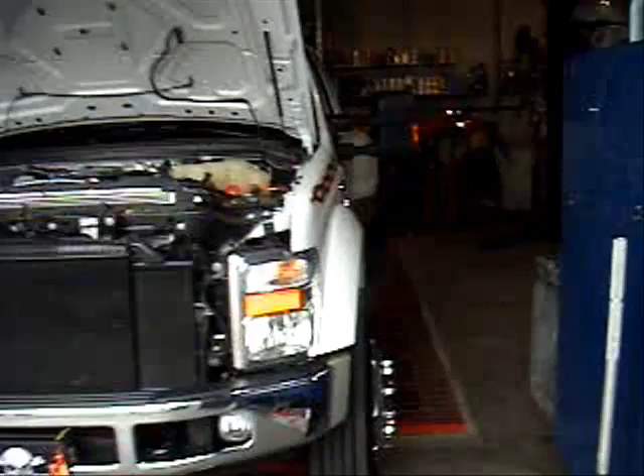What we're going to do here is dyno the truck first to see what kind of horsepower numbers we make, so we can check the differences before and after with the exhaust, the intake, and the programmer.

Here we are on the dyno, about to dyno this Ford F-450 in stock form. It's a little tough dynoing these trucks because they don't really get the load they would on the street. So all we're using this for is a database, so we can see what type of power gains we made. Ultimately we won't see the full potential because the loads will be different, but we're going to give it a shot. We'll put it in third gear and do a pass right now. Very fast pass, as it only revs to 3,700.

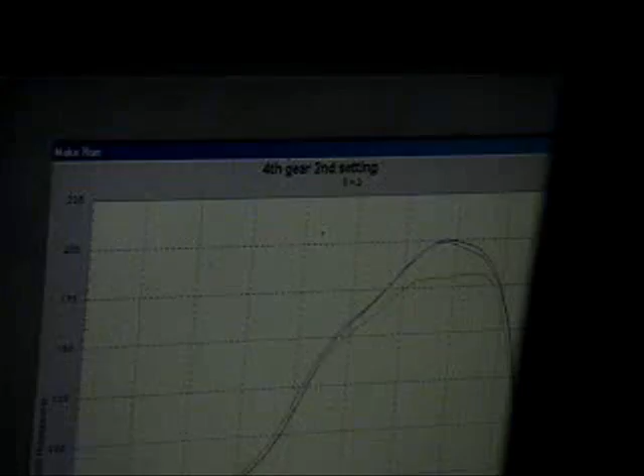That was it. Now there's the dyno pull. What did we get? A little over 200.

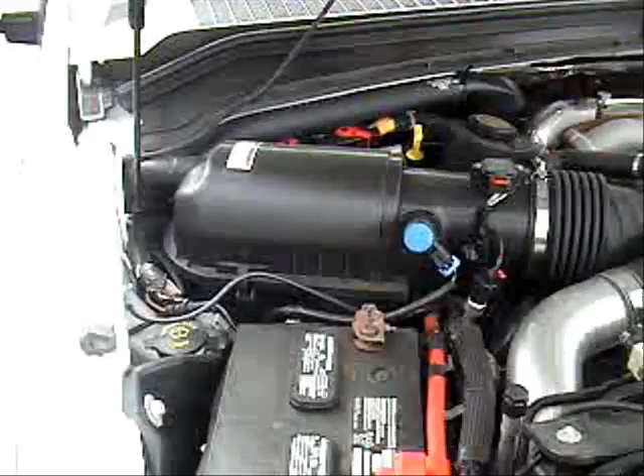Now it's time for the modifications. There's a stock intake box, so we're going to remove that and replace it with an aftermarket unit. We're going to be removing the stock exhaust down there, and putting stacks in the bed of the truck with a nice diamond plate cover. Then we're going to program it and see what kind of gains we can make. Really nice truck, by the way.

We're just putting the finishing touches on the air intake box, and next we'll be working on the exhaust.

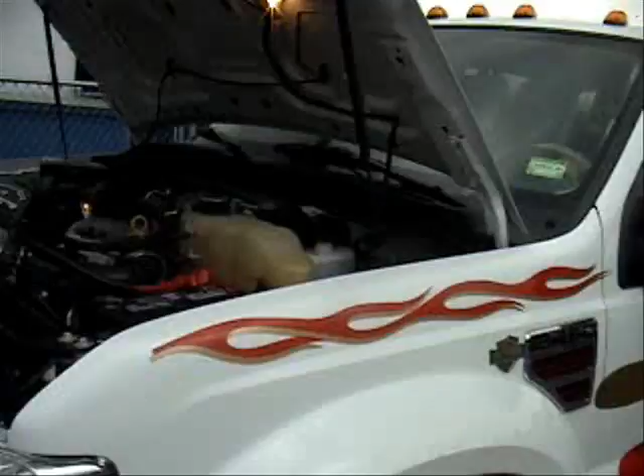Now that we have the exhaust installed, we've got a nice diamond plate cover there, and we're going to be ready for dynoing. And there's our intake. Truck's all programmed up, ready to go. We'll be on the dyno in a few minutes.

Here we are dynoing the truck with the new exhaust pipes on there, the chip, and the intake. We're going to see what kind of horsepower we make now. Put it in third gear, release the brake off the dyno. There we go.

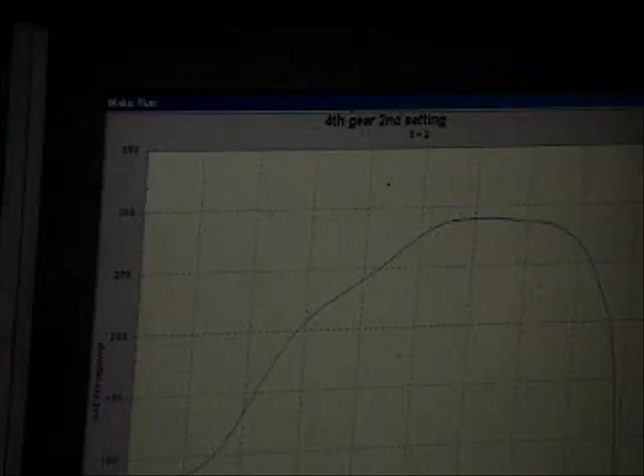What did we get? Almost 300. Good improvements.

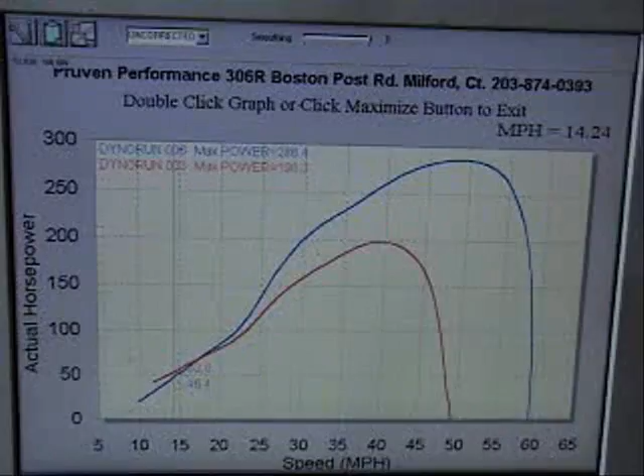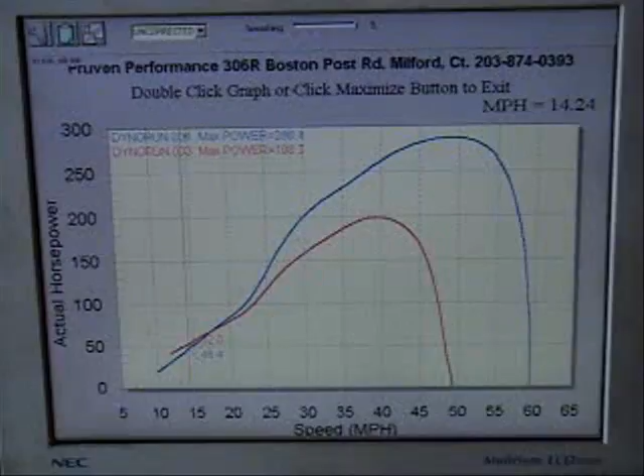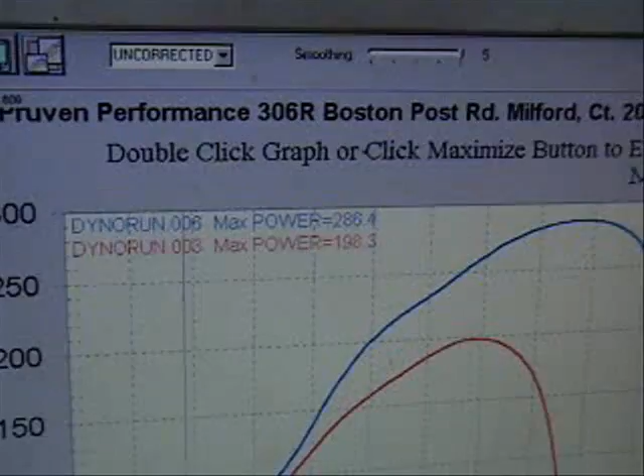Here we have the dyno spreadsheets of the before and after, with the red line being the stock dyno pull and the blue line being the dyno pull with the exhaust, intake, and programmer. As you can see, we have about 90 wheel horsepower gain for just those simple bolt-ons, but what's important is we're able to rev it out a lot more. Again, we're looking at horsepower numbers here just for comparing purposes. The truck's actually making a lot more power.

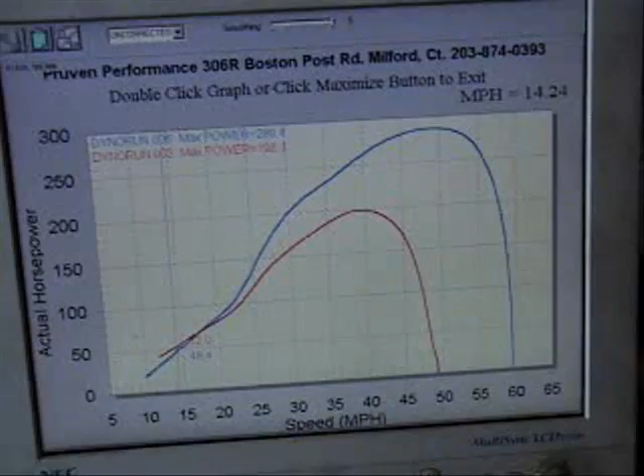We just can't load up the dyno the way you'd be able to load up the truck on the street, and a truck would make a lot more boost on the road than it does here on a dyno. So just for quick comparison purposes, it does show that those mods are very helpful to do.